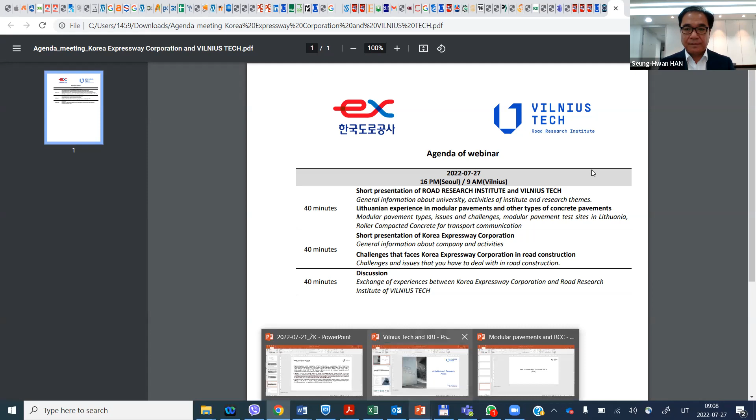Okay, can you see the slides? Yes. Okay, so activities and research area. Today just a few sentences about us. We have 2 people attending from the Road Research Institute today. Judita Gražulytė, she is the chief scientist and PhD, and she participates in a lot of activities. And I'm Audrius Vaitkus, head of this Road Research Institute and also professor in the Road Department. Today we are only 2 due to a lot of activities in the institute now.

We also have some of our main people on holidays, and also, as I already mentioned, the COVID situation. So today we are 2, but if there are any questions which cannot be answered by us, we will come back with these answers later.

So some facts and history. The history started in 1922, when the Department of Roads was developed in some other university. Then our university was transferred from Kaunas city to Vilnius city, to the capital. And finally, in 1999, the Road Research Laboratory was established. Based on that, in 2009, the Road Research Institute was established, and we are performing road research activities till now, developing research areas and so on.

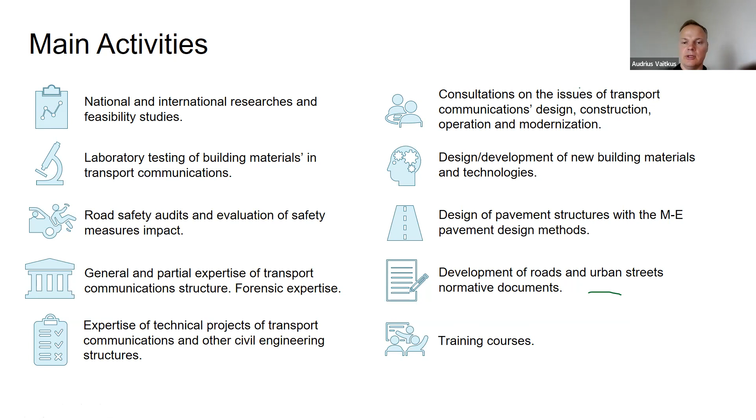Research areas include the 'open road' concept, which is quite well-known and came from the FEHRL - intelligent road building materials, developing new materials, stiffer materials, noise-reducing materials, same price but better quality materials. Then a very interesting and important topic about turning waste into a resource for road construction and maintenance. Of course, circular economy, CO2 emission reduction, and some intelligent engineering measures for road safety.

It was said that we are about 40 members of our team, but we have a lot of different departments in the university, and we provide a lot of connected activities - for example, with the buildings department, bridge department, and also environmental issues department, geodesy, etc. So we have a lot of connected activities with other departments in the university.

We introduce a few slides about our latest research project. Over the last 5 years, we had 3 plants which burn municipal waste, and it generates MSWI bottom ash. It seems that we already have about 150,000 tons per year of this aggregate, which comes from burning municipal waste and getting electricity and also heat for house heating.

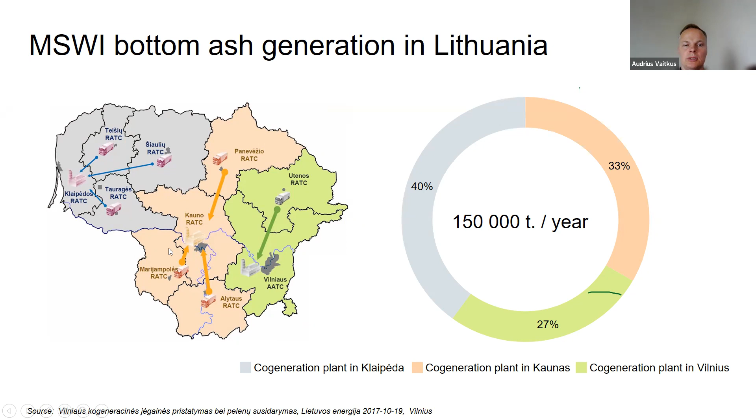And you can see this is like a normal aggregate, but with a little bit different characteristics compared to, for example, dolomite aggregate or granite aggregate.

After our research, it's already stated that it can be used in the lower part of the pavement structure, so in some sub-base layers. And now we are doing some research about possible usage in base layers and even in asphalt concrete.

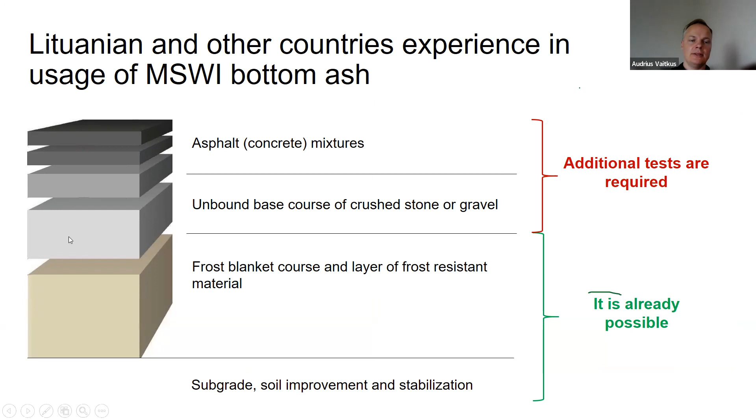So in 2021, a project was started by the Lithuanian Road Administration, and the road was built with this house waste bottom ash, MSWI bottom ash. We had different pavement structures with a section length of 200 meters, and in general it was 1 kilometer.

We installed some sensors, etc., and we have different combinations. For example, all the subbase and bases from MSWI bottom ash, and in other cases we have only subbase and bases with a mixture of natural aggregate and 30% and 70% of the ash.

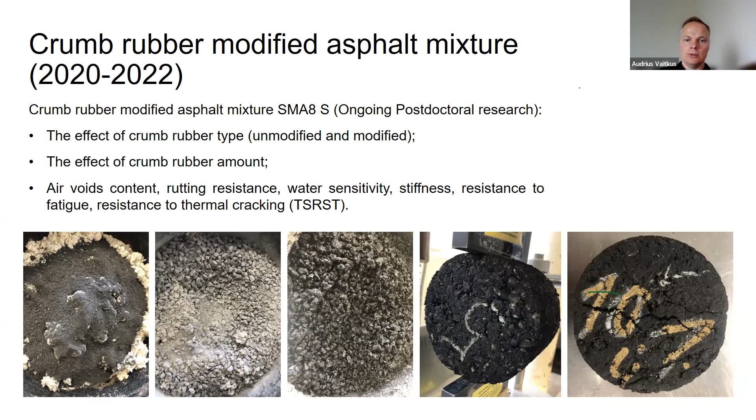Another research project which is important for us, due to the recycling of used tires, is crumb rubber modified asphalt mixture. We have some PhDs regarding this and also ongoing postdoctoral research, to use rubber from used tires for asphalt modification, to replace the costly polymers and to get the same or quite similar characteristics.

So in 2020, just beside our institute, we made a test section where the stone mastic asphalt was modified by crumb rubber. We see that the exploitation of that section is very sufficient, and it can be very easily compared to polymer modified bitumens.

Another important issue is noise mitigation, and from 2014 we developed quite a lot of mixtures related to noise reduction. Here you can see our measuring device, CPX, where we can measure by the close proximity method the tire and pavement surface noise levels.

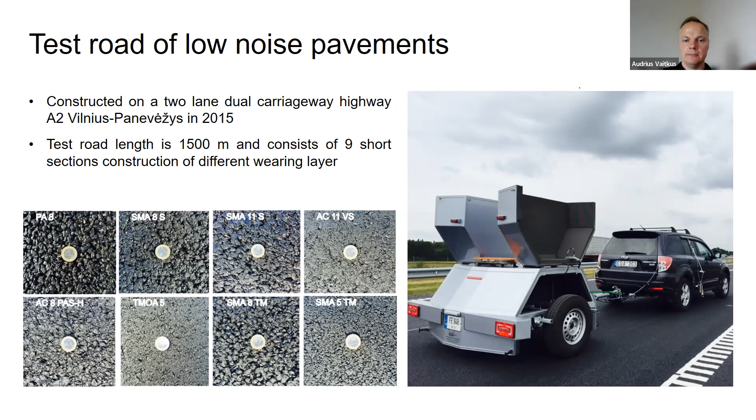And the last initiative comes from business, and we have a design project in Vilnius city, where some cross sections will be rebuilt. In one section we have a very high level of longitudinal slope, and in some sections about 70-100 meters, it's needed to secure that during winter time the pavement will not be so slippery, and the buses which go on that elevation or hill wouldn't slide to the side of the road.

So now we are starting discussion with designers and also with some companies. We will have a meeting on Friday about how to deal with that section and how an anti-icing system based on geothermal energy can be installed.

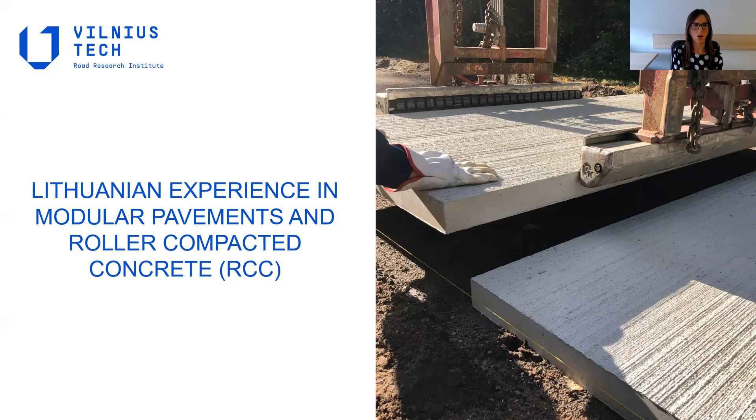As was presented, now we will talk about our experience in modular pavements. As it was mentioned, we had a huge project in 2017, and it lasted 3.5 years. This project was focused on modular pavements, and the aim of the project was to expand the applied knowledge that is essential to the development and commercialization of modular pavements.

So the main concept of modular pavements is that these pavements are precast in the plant, and the prepared slabs are transported to the project site only after the curing period, when the desirable concrete strength is achieved, and these slabs are installed on the prepared foundation. Modular pavements typically are also known and named as precast concrete pavements, so in our presentation sometimes we use the abbreviation PCP, which stands for precast concrete pavements.

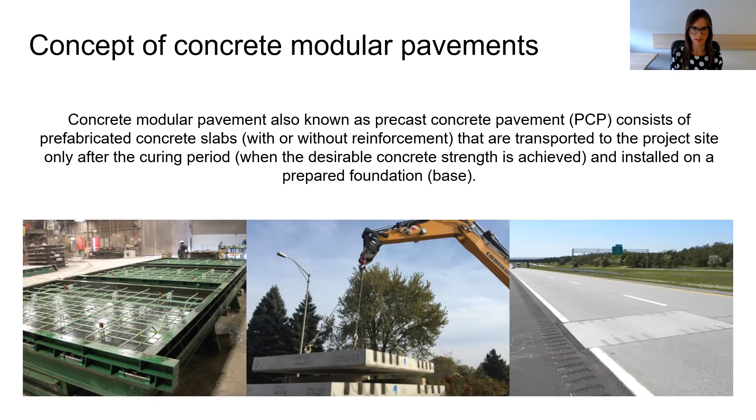Concrete modular pavements are superior to typical pavements because they are fast constructed and fast repaired. Typically, the works are done during the night, from about 8 p.m. up to 6 a.m., which means traffic congestion is reduced to the minimum because the whole road shouldn't be closed, and of course the traffic volume is much lower.

Also, slab prefabrication in a plant results in better concrete quality because we can control it better, and we can control the curing conditions, which is also very important for the final product. When we produce modular pavements, we practically eliminate the risk of material segregation, which is very relevant and important for asphalt pavements when we transport the materials. In the modular pavement case, we produce slabs in the plant, so we don't need to transport all these materials, and we eliminate this risk.

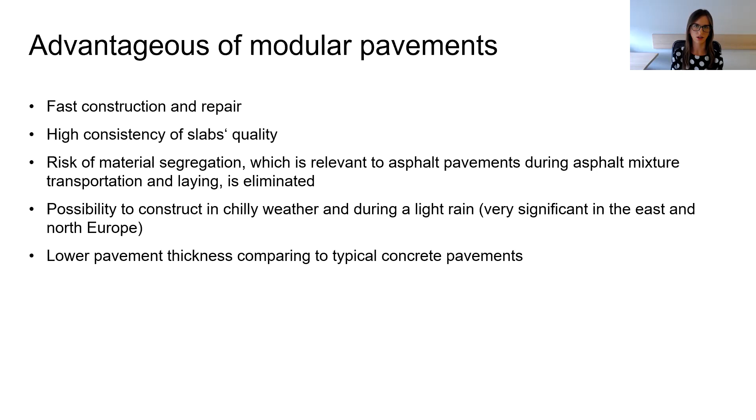In general, three types of concrete modular pavements exist. The first one is precast prestressed concrete pavement. The second one is jointed precast concrete pavement. And the last one is incrementally connected precast concrete pavement. We will discuss all three types in more detail a little later.

All types of these pavements can be used to construct new pavements and to repair existing cast-in-place or even precast concrete pavements.

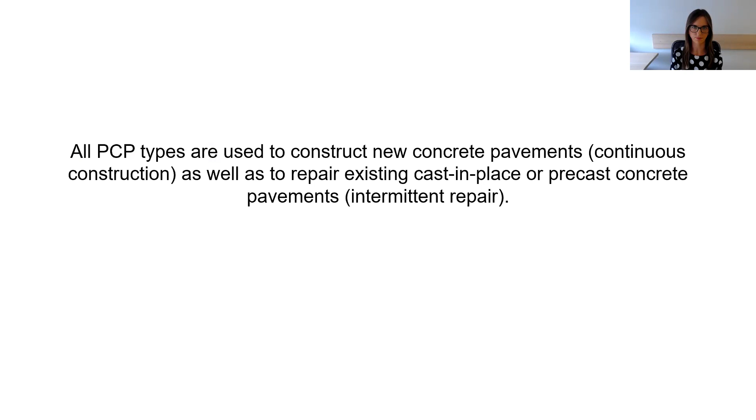So let's get back to all three types. As I mentioned, the first one is precast prestressed concrete pavements. This pavement consists of wide and quite short panels, which are post-tensioned together in the longitudinal direction on the project site in order to form an effectively jointless slab. Each separate slab is prestressed in the transverse direction during fabrication, and the width of the panel is usually equal to the full width of all traffic lanes, and of course shoulders if needed. The length of the panel varies from 2.5 to 4.3 meters.

What I like to say is that this type is very rarely used, and most test sections were constructed at the beginning of the development of modular pavements.

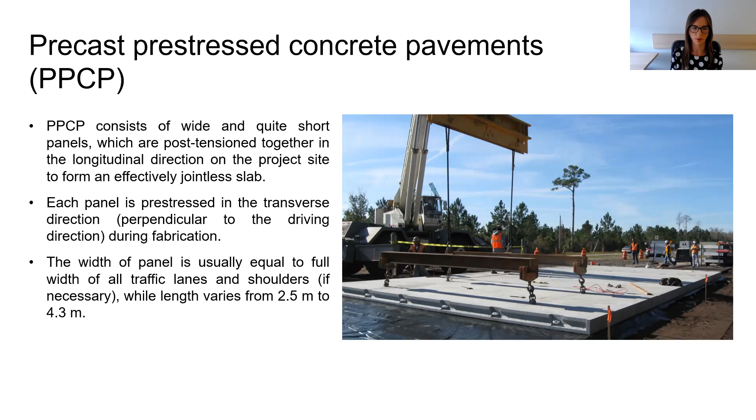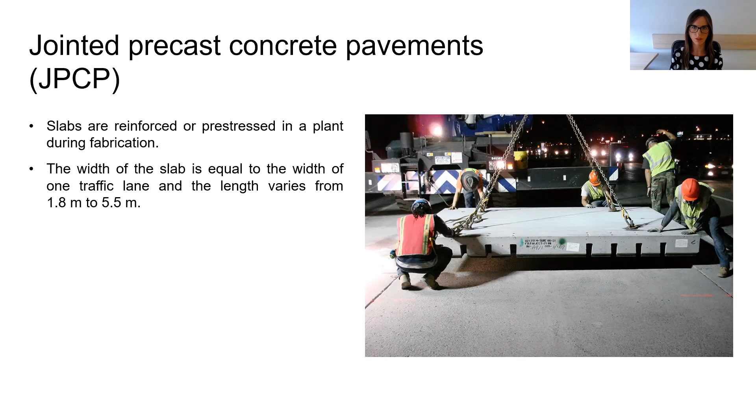The second one, and the most popular type of modular pavements, is jointed precast concrete pavement. In this case, slabs are reinforced or prestressed in a plant during slab fabrication. The width of each slab is typically equal to the width of one traffic lane, and the length of the slab varies from 1.8 to 5.5 meters. All slabs together are connected on the project site using different systems of dowel bars and slots.

Typically, these systems with dowel bars and slots have to ensure that load is transferred between the slabs. It is known that at least 11 different systems based on this concept are developed.

The main difference between these systems is the techniques used to connect the adjacent slabs and to level the slabs. Now we will look more deeply into some of these systems, how they differ, and what are the main characteristics, aspects, and so on.

The first one, I would say the most known system, is the Fort Miller Super Slab system. This system was developed in New York. The precast slabs are constructed on a thin bedding layer, which is placed over the existing subbase. In this system, dowel bars, tie bars, and slots are cast into the bottom of each slab.

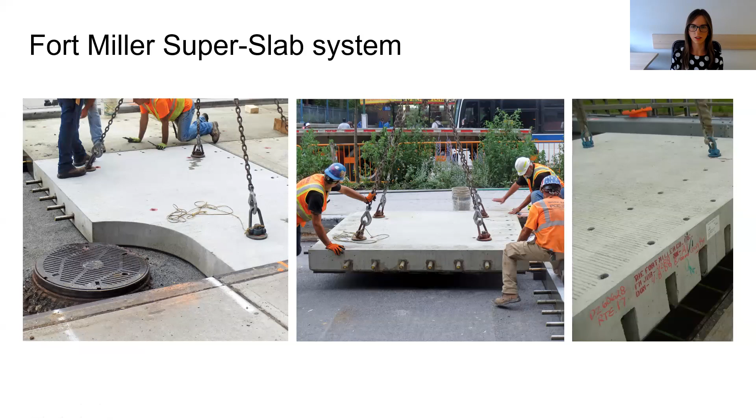A special method with two grout ports, which you can see here, is designed so it would be easier to pour the grout that fills the slot and ensures there is no air between the dowel bar and slot. The second system is the Quick Slab system.

This system consists of patented Quick Joint steel couplers, which interlock reinforced precast slabs, allowing reinforcement to continue throughout the length of the connected sections. The main drawback of this system is that the length of the adjacent slabs is limited, and expansion joints between connected sections have to be installed.

The third system is from the Netherlands. The main difference from other systems is that the slabs are not connected with dowel bars. Instead, they are placed on precast reinforced concrete piles with cross beams and connected to them using pre-stressed anchors. However, slabs can also be constructed on grade support, in which case the load transfer between adjacent slabs has to be ensured.

In the ModieSlab system, slabs are constructed of a reinforced concrete layer covered with two porous concrete layers. The upper layer of porous concrete is fine-grained, while the bottom layer is coarse-grained. This composition enables a reduction in tire-pavement noise, and slabs are typically manufactured upside down in order to guarantee a very even surface.

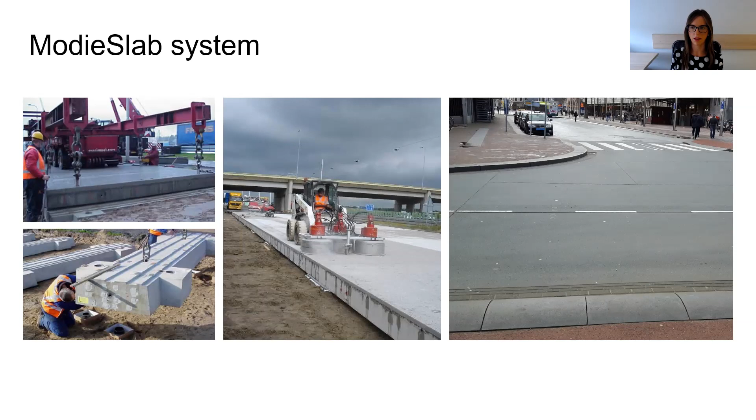Also, if there is a need, the ModieSlab system can also contain a pipeline system to control the temperature of the slabs. One more system is the prime system.

This system is unique because of hexagonal shaped slabs. The joints between slabs are filled with waterproof polymeric material. In this case, slabs are mechanically independent. Otherwise, concrete connection keys are used to connect adjacent slabs, and joints are filled with fine-grained sand.

When using fine-grained sand as the filling material, pavement is built in successive lines, progressing from one edge to another, and slabs are interlocked to each other. This interlocking enables some level of load transfer at the joints and leads to smaller slab size.

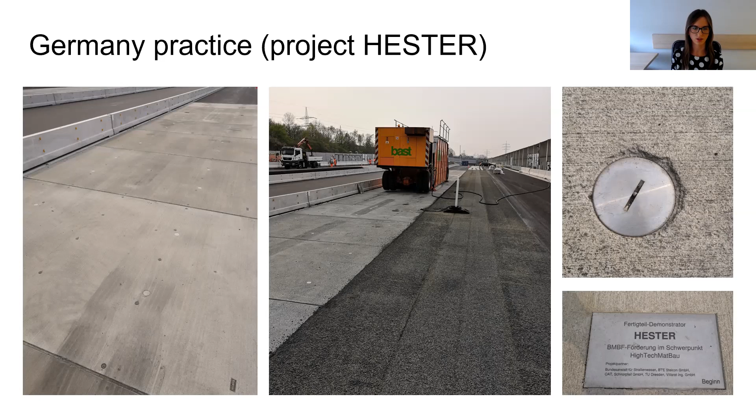The consistency of the foam is very important, since in the first tries to install these slabs, the foam was too viscous, too dense, and actually the foam should be very liquid, like water. Then the composition of the foam was changed, and it was successfully installed.

The last type of precast, pre-stressed concrete pavements is incrementally connected precast concrete pavements. In this case, slabs are either reinforced or pre-stressed. The width of each slab is equal to the width of one traffic lane, and the length varies from 4.6 to 9.1 meters.

Deformed bars are used to connect the slabs, and they also lock the connected joint and enable load transfer across the joint. Active joints are constructed only between sections. This method is more theoretical; in practice it's rarely used, and it's hard to identify in which sections it's actually been used.

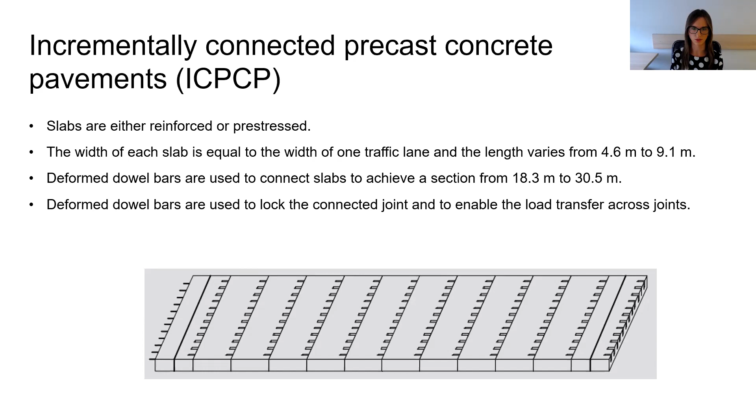Now we will talk a little about the support of the slabs, because it's very important - a strong and uniform slab support is actually key to successful pavement performance. In general, three types of support exist: grade support, grout support, and pile and beam support.

In the case of grade support, a bedding layer is typically placed on the existing pavement. In the grout support case, leveling boards or shims are used, and the gap under the slab is filled with a high-strength bedding grout.

In some cases, urethane grout is used, for example polyurethane foam materials, and in these cases there is no need for leveling boards and shims. You just pour the foam under the slab, and it will expand and lift the slab to the desired position, providing uniform seating of the slab over the existing base.

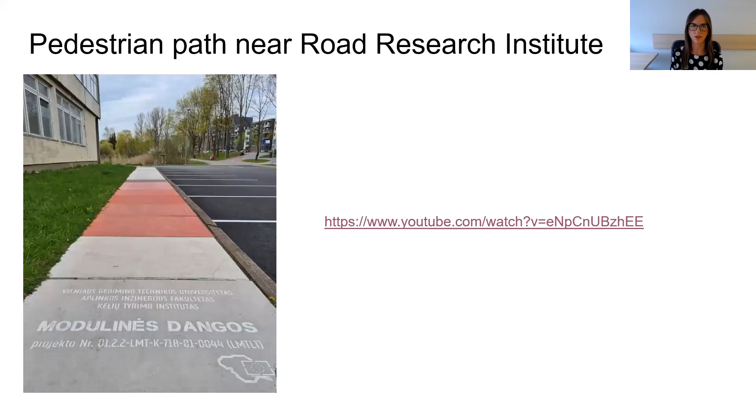As mentioned, most of our test sections are pedestrian paths. Here is a short video of how we constructed it.

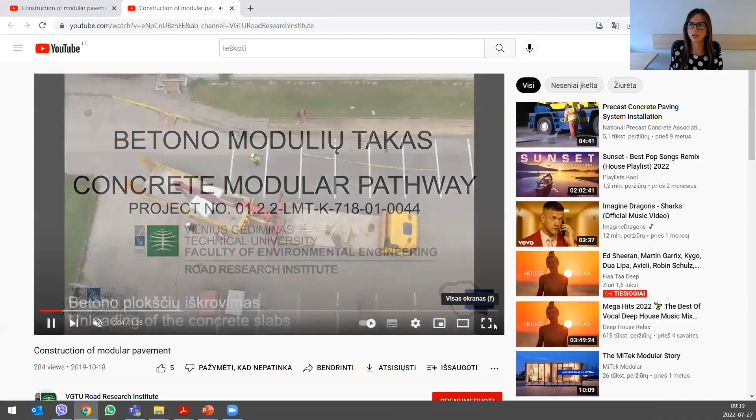Do you see it? Yeah, okay, yes, it's okay.

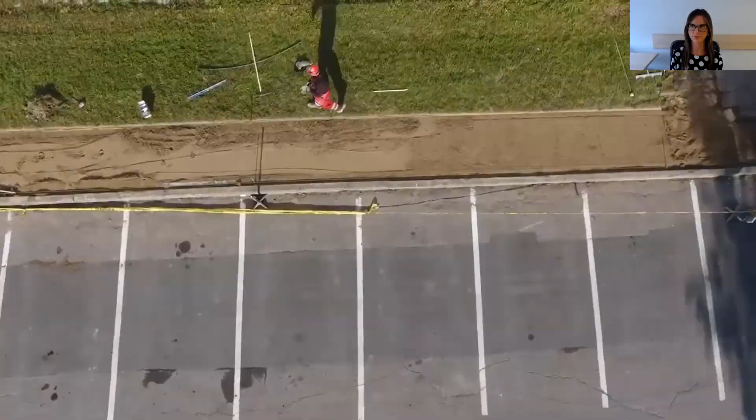As you can see, the slabs were produced at the plant and then transferred to the project site. The site is near our institute, so we have a nice sidewalk. On the existing pavement we put a bedding layer, and on that bedding layer the slabs were constructed.

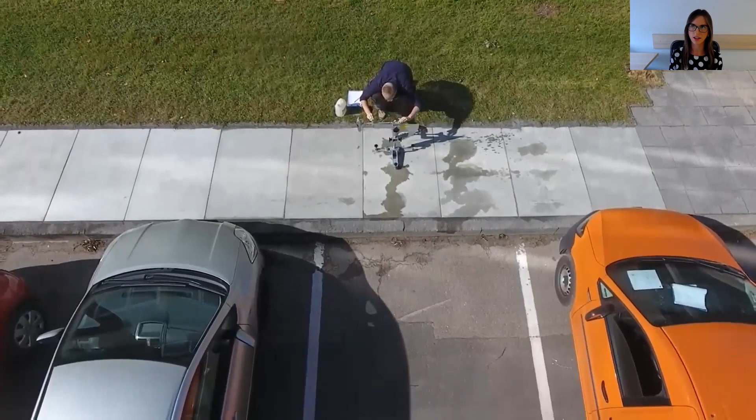You can see here a vacuum machine which helped to lift the slabs and transport them to position. After construction, we made different measurements. We measured texture because we designed different types of texture using different surfaces.

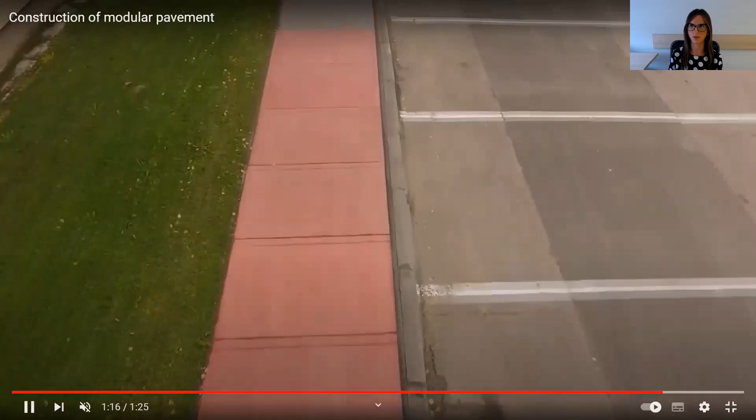And here is our pathway made from different modules. So shortly about this.

As I said, this pathway is near our institute and it was constructed in 2019. Slab dimensions are 1 meter length, 1.5 meters width, and 5 centimeters thickness. The slabs were without reinforcement, and the total length of the path is 21 meters.

We have 4 different pavement structures: smooth surface, smooth texture, rough texture, and texture achieved as a result of exposed aggregate concrete usage. These textures were achieved by using different texture mats. We also used two different agents to achieve red color: powder and liquid pigments.

The slabs were produced from a typical concrete mixture with synthetic micro and macro fibers, which were added later. 20 slabs were produced with these mixtures, and one slab was produced from exposed aggregate concrete, developed at our laboratory. All slabs are without reinforcement, and joints between two slabs were filled with granite screenings.

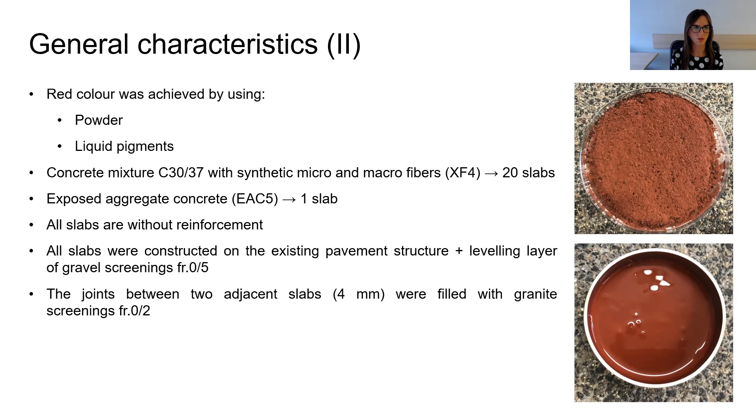Also, we have some scaling and pop-outs, and they are mostly related to winter maintenance, because we are using de-icing salts and chemicals, and of course it's a result of freezing and thawing cycles, which are quite often in Lithuania.

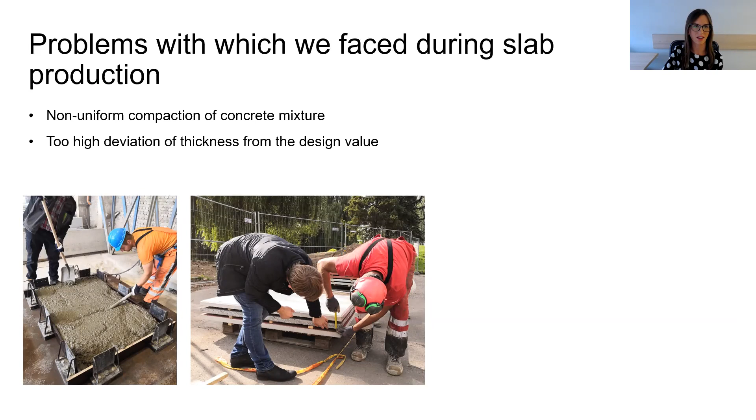I'd also like to show what problems we faced during slab production. One of the main problems was non-uniform compaction of the concrete mixture. We also had too high deviations of thickness from the design value, so in some cases we had even less than 5 centimeters, and there was too high water-cement ratio. All of these problems can actually be solved by precise production quality control.

Actually, it was our first trial, and we had a company who produced these slabs, and it seems that they didn't believe in our project, and probably that's why we had these problems.

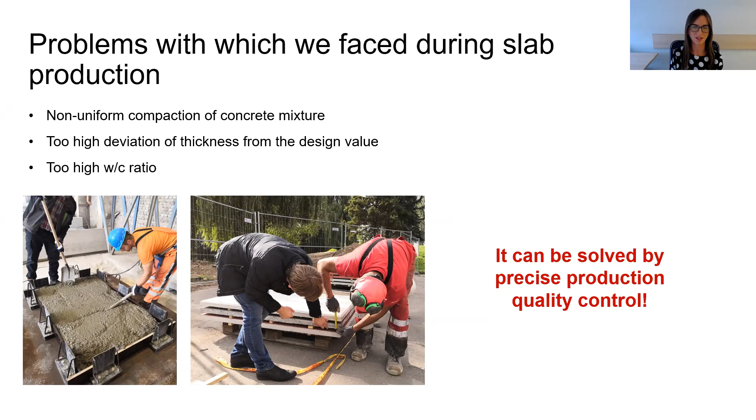The second test site is a pedestrian path in another street of Vilnius. This pedestrian path was constructed in 2020. The slab dimensions are 1 meter in length, 1.8 meters in width, and the thickness this time is 6.5 centimeters. The whole length is 22 meters, and the texture is the same, and it was produced with a concrete mixture.

with exposure class XF4. It means that it should be resistant to freezing and thawing cycles, and to chemicals that are used for de-icing, and all slabs were reinforced with 2 mats, top and bottom.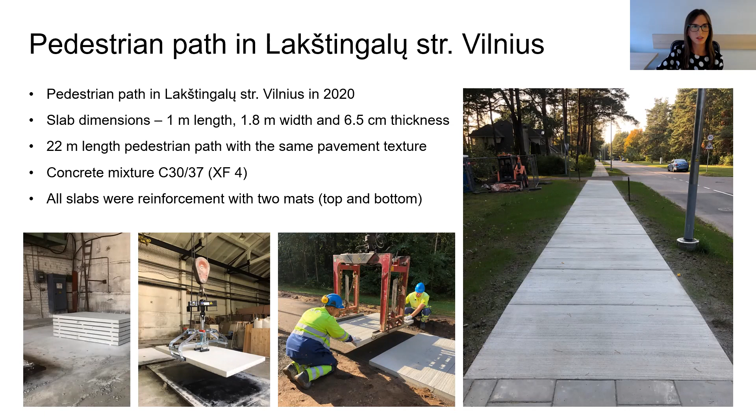And actually, it seems that it worked quite well. Here is the pavement structure, and joints between two adjacent slabs were filled with granite screenings. For this pedestrian path, we also used municipal solid waste incinerator bottom ash, which was presented earlier.

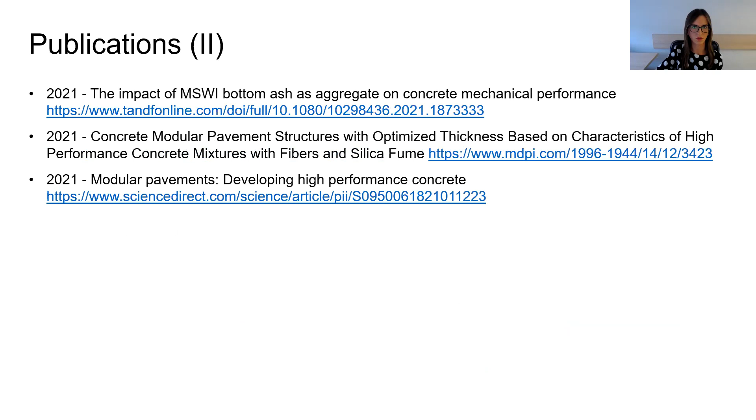So here are all our publications that were delivered during the implementation of the project. We also have some patents. Most of them are for the designed concrete mixtures, and one patent is submitted to the European Patent Bureau.

Here are our main findings and recommendations for further research. I will go very fast for them, since we have other presentations. In general, as I mentioned, the most popular type of precast pavement is jointed precast concrete pavements, and these can be used both for repairs and continuous construction.

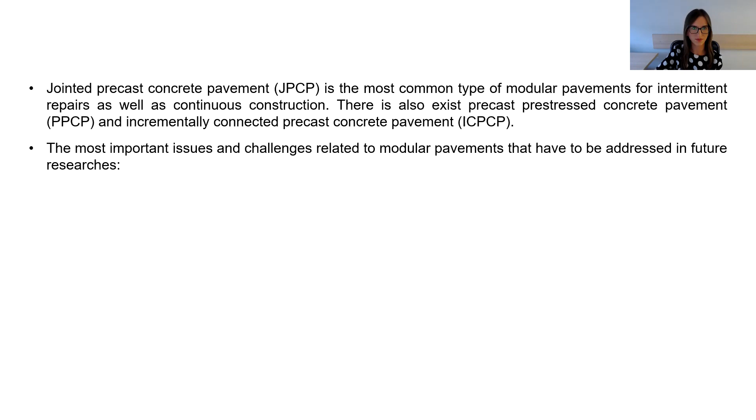During our project, we identified the most important issues and challenges related to modular pavements that have to be addressed in the future. These are fabrication of slabs, assurance of uniform support, and very important, the connection of the slabs, etc.

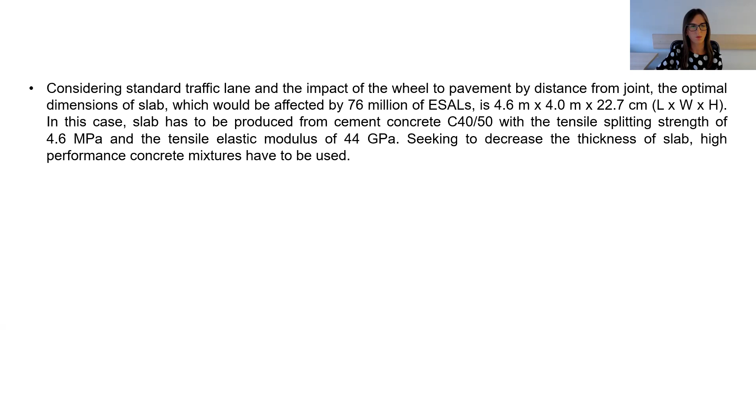Here we used the existing calculation methods and determined the optimal dimensions of the slab in this specific case. It was determined that, seeking to decrease the thickness of the slab, a high performance concrete mixture had to be used, and later we developed this kind of mixture that helped to reduce the thickness of the slab.

Also, we tried to produce slabs with municipal solid waste incinerator bottom ash, and it resulted that we can replace up to all of the coarse aggregate.

We also developed exposed aggregate concretes for sidewalks and for highways, and it is recommended to use a negative retarder when we are preparing exposed aggregate concrete elements.

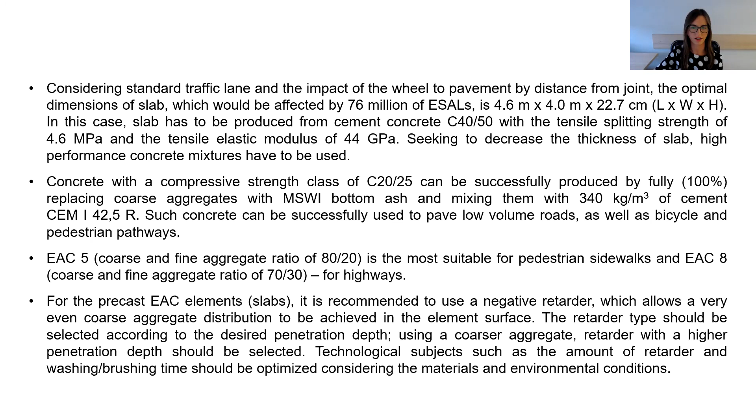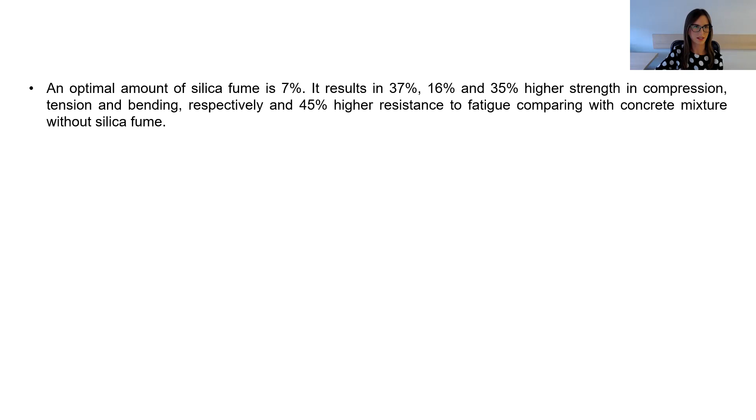Also, we checked if silica fume is worth using, and it seems that 7% is the optimal content, and the use of both fibers and silica fume leads to the best mixture performance.

We later developed a mixture which has both these elements, and the use of this mixture results in the reduction of thickness from 322 millimeters to 200 millimeters if it's an unbound base course.

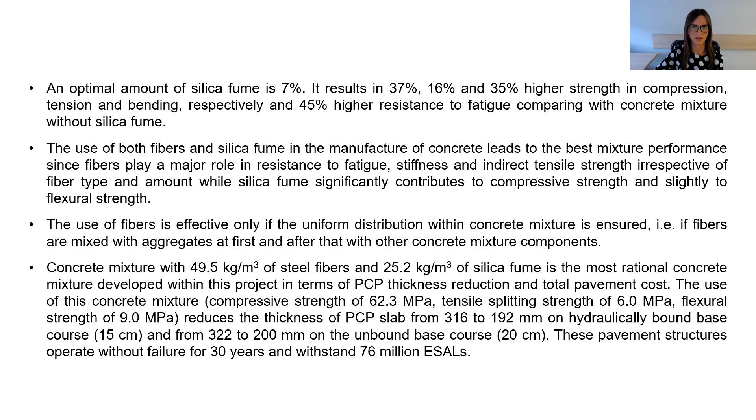And our last recommendation and finding is that 6.5 centimeter thick concrete slabs with top and bottom reinforcement can be successfully used to construct pedestrian and bicycle paths and sidewalks. So that's all from the modular pavements topic.

And now we are going forward to discuss roller compacted concrete.

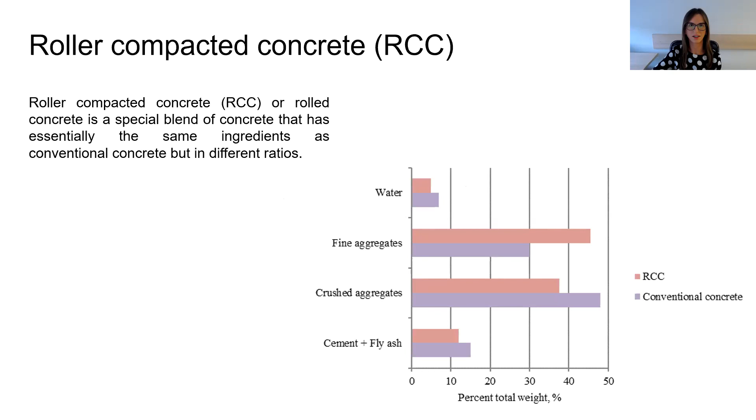Maybe you would like to share my... Yeah, I will share by myself, okay? Okay. If you could stop sharing. So you are going to share? Yes, I will share. Okay, sorry, yeah, fine. Okay, can you hear me properly? No?

Okay, so roller compacted concrete, as we started to use it some 5 years ago in Lithuania, comes from history. It was developed some almost 40 years ago in the United States. Afterwards, there was quite a lot of improvement in composition and possible usage areas, etc.

Dealing with the differences between roller compacted concrete and regular conventional concrete, you can see from the graph that in roller compacted concrete we have less water, more fine aggregates, less crushed aggregate, and less cement. But we can reach the same characteristics, the same strength, compression, and flexural strength as the conventional concrete mixture.

So the possible usage is container terminals, seaports, airport aprons, roads and streets, and also it can be used as a base layer for highways when we use joint plain concrete pavements. It can be used as a base layer.

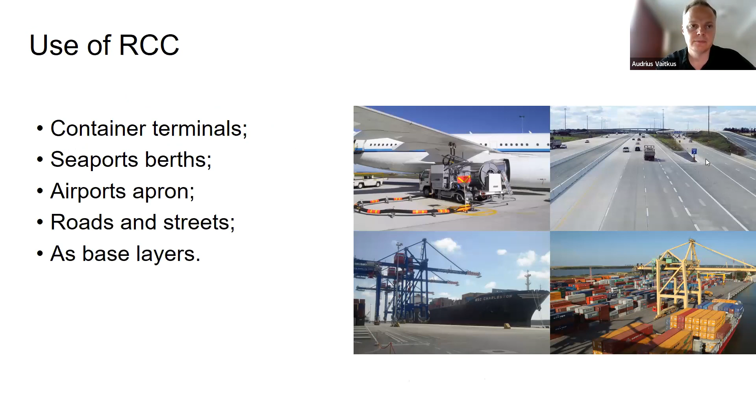So some advantages and disadvantages: fast construction, economical, long life, ability to withstand high stresses and high bearing capacity. Quite a lot of advantages, but some disadvantages - there are additional requirements for the concrete plant. To get a very good composition of mixture, very precise organization of work is required, as you should do quite a lot of things in very short time to deliver the concrete on site, lay it down, and compact it during 1 or 1.5 hours.

Smoothness and aesthetic appearance sometimes isn't the same quality as joint plain concrete pavement when we use the slip form paver. So the typical structure - here you can see that it was a developed pavement structure.

With a stabilized base layer, so there is no regular unbound base layer. We developed the pavement structure so we do not need to do a lot of soil replacement, so it is cost efficient. Then we can use the same soil which is on site, and we have to stabilize it.

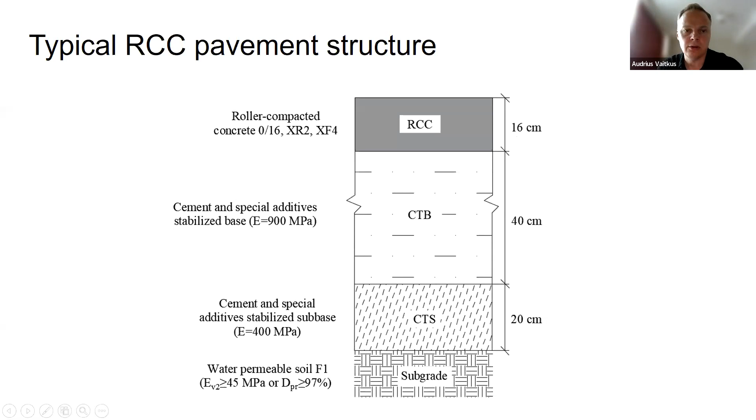This is like an example for a quite heavy crowded road or area, and how it looks on site. You can see the stabilization, the cement, some additional preparations, also some additives - cement, water, and intermixing everything, then compacting. So it will be the base layer.

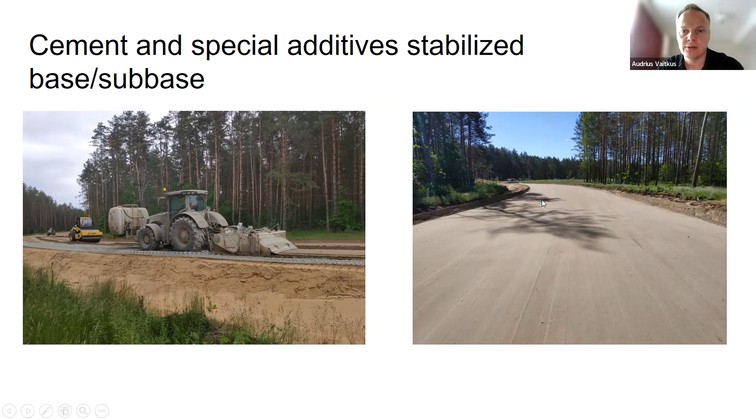So how it looks like after compaction, and finally laying down the roller compacted concrete on top. You can see it looks like a regular asphalt paver, but with high density, high amplitude, and high frequency compactor. After the paver we get quite a high level of compaction, 95%, and afterwards we have to compact with the roller till 98%.

Starting from 2016, the first section was in a private territory, private road, and this is the combination. We used different thicknesses, starting from 10 to 16 centimeters, and only 30 centimeters of stabilization. After 8 years, the road is in good shape and good condition.

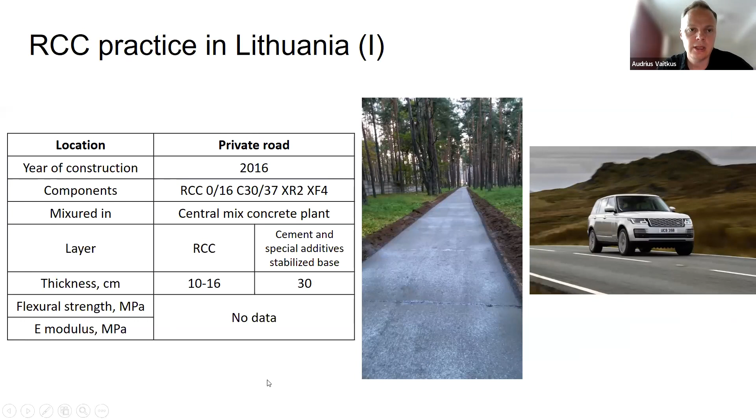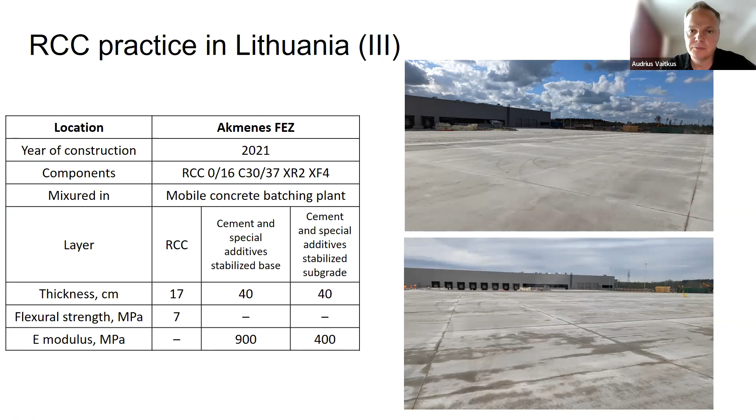Another project is for a pedestrian pathway in Kaunas city by the Neris river. And in 2021, we started with very crowded areas, so high stress pavements with a lot of heavy vehicles. You can see here 17 centimeters of roller compacted concrete. Each time we calculate what minimum thickness is needed to carry the heavy loads, and another project for military purposes.

We already had almost 2 years of monitoring of this road, and it is in very good condition. Even tanks are using this road.

Also another military project in another military small city, we can call it that. In previous time we used a lot of precast concrete plates, but it was not a very good aesthetical view, and also they have quite wide joints, so it's not very convenient to walk on that type of pavement. Now the military want to have a lot of these roller compacted concrete pavements, and they like them very much.

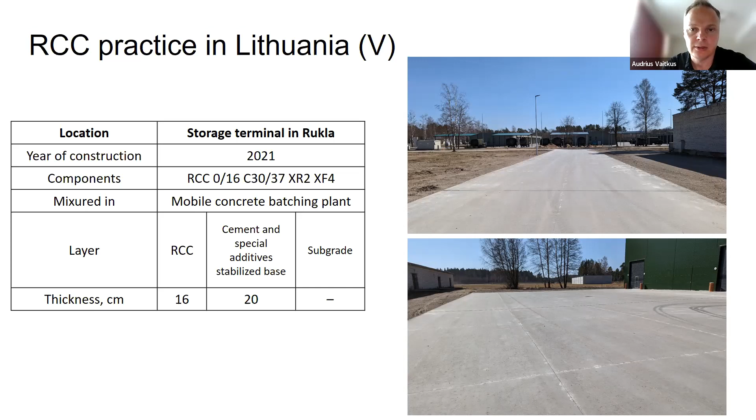So the last activities in this year. Some companies have very good concrete mixing machines, and the best quality we get when we produce concrete mixture on site, very close to the construction site, because we have to mix, deliver on site and compact within 1.5 hours. This is quite a short time. Of course, we can use some additives which can expand the time for laying down and compacting the layer, but still it is very efficient, and you have a mixed plant on site.

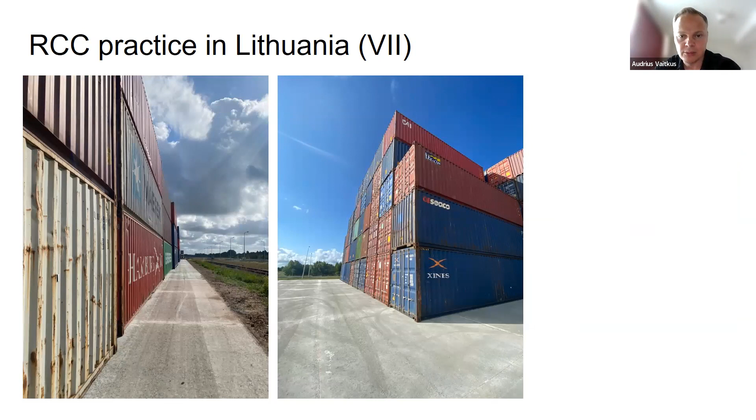So here are some examples. We have national standards with typical pavement structures and typical pavement thickness for some design load. For example, DK10, that means 10 million standard axle loads of 10 tons can pass this road during the design life.

But we have a lot of different situations, for example 7.7 million axle loads, and using some special design methods, we can calculate precise thicknesses of pavement structures depending on the particular pavement load, the design load.

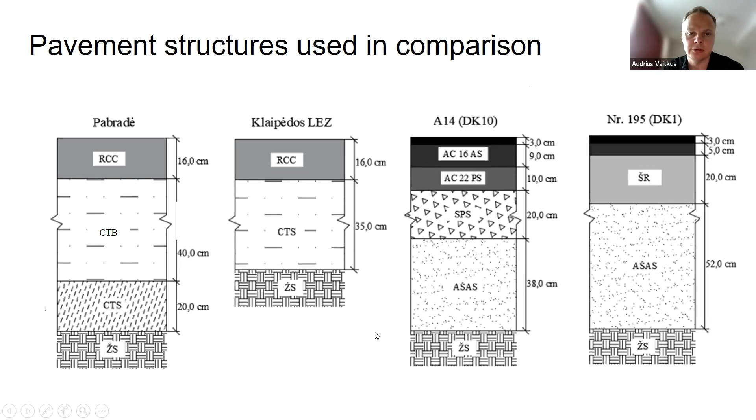This is a short presentation from our side. We are a little bit behind schedule, but I hope it was interesting, and if you have some questions, we will be happy to answer them.

Thank you so much. It was very interesting.

And yeah, let me give you my presentation. First of my presentation... can you hear me clearly? Okay, yes.

My first presentation is on the status of expressways in South Korea and the Korea Expressway Corporation. That's the content of this presentation.

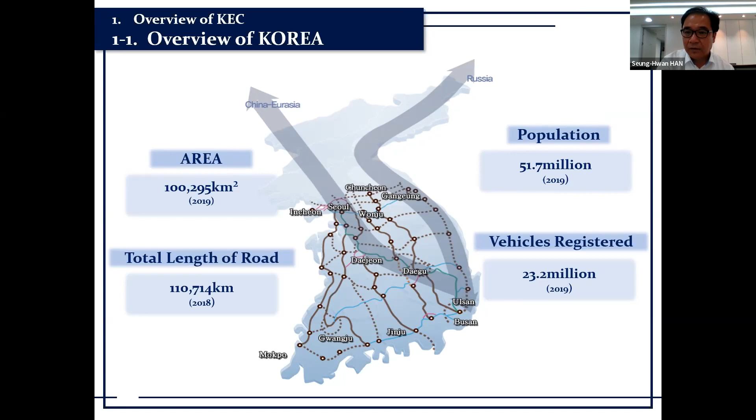This is some statistics of South Korea. We have 100,000 square kilometers and 51.7 million population. It's quite a densely populated area compared to other countries. And we have 110,000 kilometers of road length, and 23.2 million registered vehicles. Our size is quite similar to Greece among European countries.

Our roads are composed of expressways, national highways, metropolitan city roads, provincial roads, and county roads. The expressways and national highways in particular are managed by the central government, the Ministry of Land, Infrastructure and Transport. And expressways in particular are managed by the Korea Expressway Corporation, which is a public company like the Autobahn in Germany and Asfinag in Austria.

Almost all expressways were built, operated, and maintained by Korea Expressway Corporation. As you can see in the slide, 617 kilometers of expressways were built by PPP projects, owned and managed by private companies. The particular thing about Korean expressways is that almost all are toll roads, meaning maintenance and rehabilitation work is funded by toll fees from users.

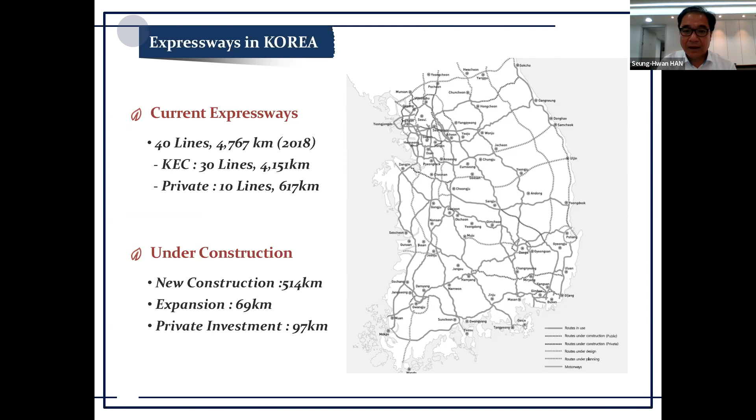That's the final master plan of the network in South Korea. We call it the 7x9 network system. By 2020, we have 4,900 kilometers of expressways around the country.

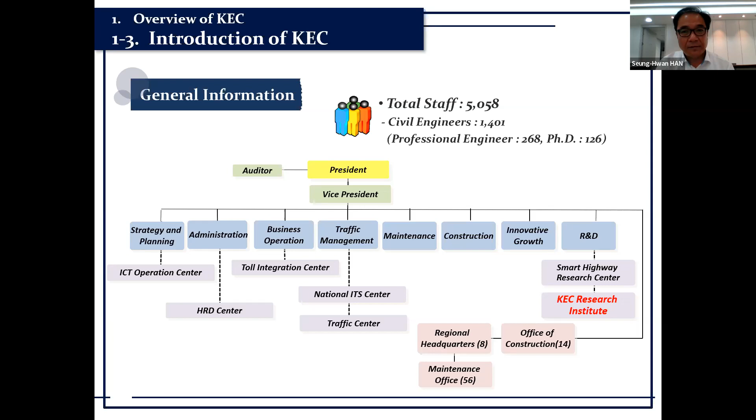This is the KEC general information. Korea Expressway Corporation has 5,000 staff. One of the divisions is the R&D division, which I work for. The R&D headquarters is composed of 3 parts. One is the research institute, which is the main body.

And we have 2 special centers. One is the Smart Highway Research Center, the other is the Smart Construction Research Center. The Smart Highway Research Center is for preparing automated roads, interconnected roads, and unmanned vehicles. The Smart Construction Research Center is for automation in construction works, civil works, and roadways.

We actually started as a small lab in 1969, and in 1989 we were certified as a public research institute specialized in roadways. In 2002 we established our current organization setup, and now we conduct around 100 research projects every year. And that's the vision.

I'll skip this one. This is the organization chart of the research institute in Korea Expressway Corporation. We have some offices and small divisions: Office of Environmental Research, Office of Pavement Research, Office of Transportation and ICT Fusion Technology Research, Office of Structure and Geotechnical Research and Safety and Disaster Prevention, and Corporate Strategy Research.

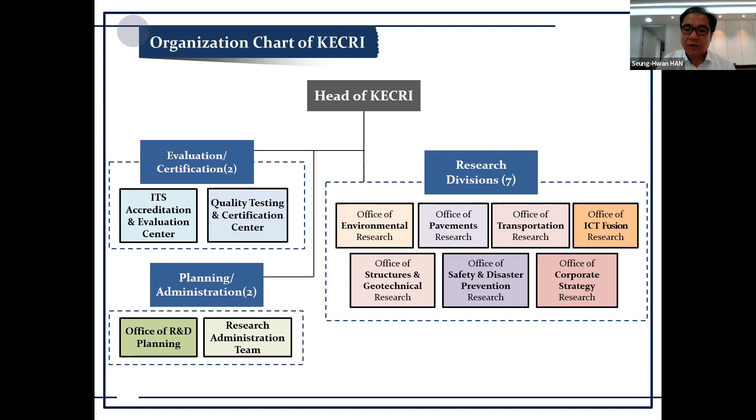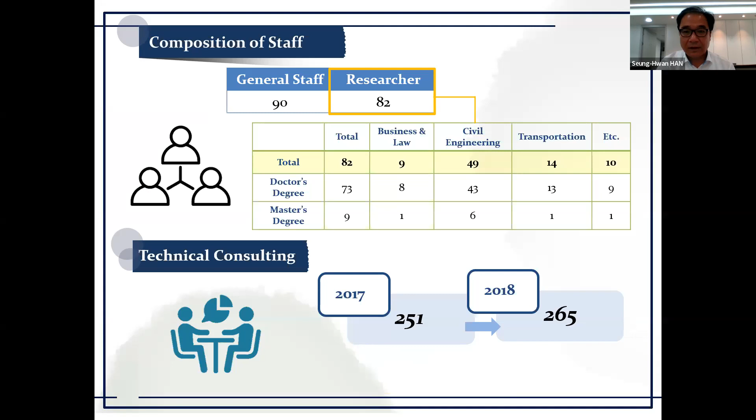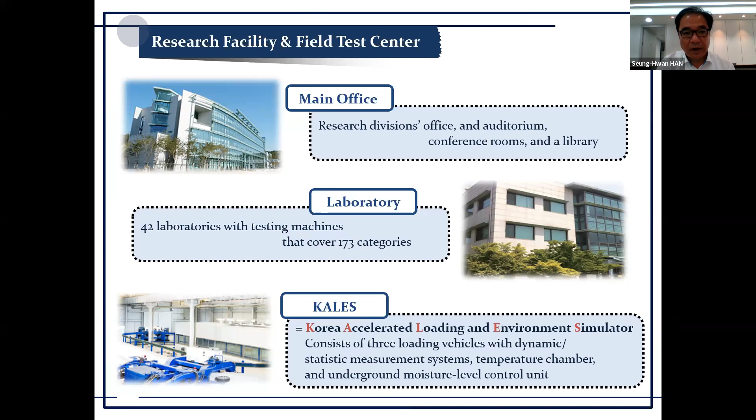I can show you some facilities. You can see the main building, lab buildings, the accelerated loading and environment simulator for pavement, and the driving simulator for automated vehicles. There's also the vehicle crash test center, and we have a field test road of length 7.7 kilometers near the expressway.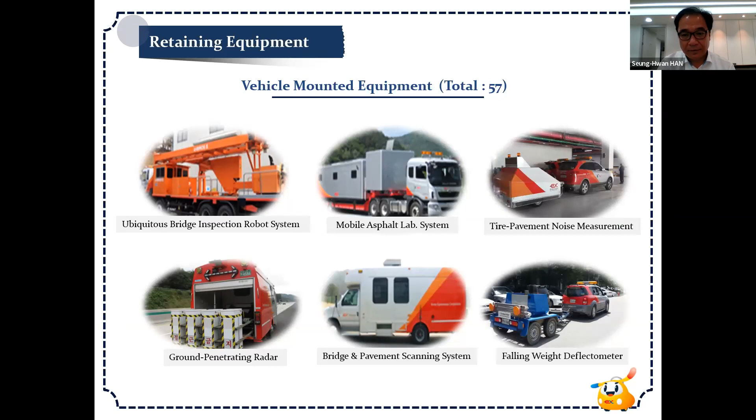Some equipment we have includes an inspection robot system, mobile asphalt lab system, and noise measurement equipment. As Professor Patico said, we have a similar one. We also have a GPR system, a pavement scanning system, and FWD equipment for PMS. And you can see some lab apparatus and lab equipment here.

The main topics of R&D for pavement include pavement design guidelines. As Mr. Batikuta said, we have our own ME pavement design guide, the Korean guide. We developed it, applied it, and modified it.

We also conducted research on pavement material characteristics, PMS systems, and pavement preservation. Particularly nowadays, we are interested in low noise pavement. As you said, you already have that kind of research work. We are also interested in the use of new materials like GFRP, glass fiber reinforced polymer, and life cycle assessment for sustainability.

That's the global network. We have connections with some institutes around the world.

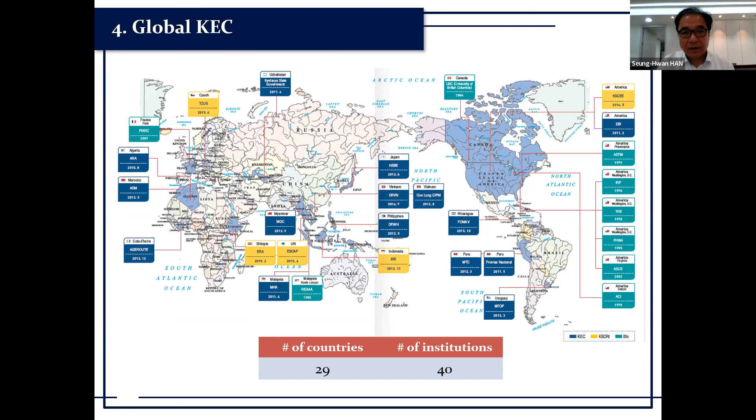Okay, actually I'm speeding up to catch up with the schedule. Forgive me about that.

This is my second presentation, on modular pavement in South Korea. As you know, prefab and modular elements in civil works are getting important. As Dr. Gratulite said, the report on the future of construction pointed out three keywords for the future: one is AI, artificial intelligence, the second is prefab and modular elements in construction, and the third is eco-friendly.

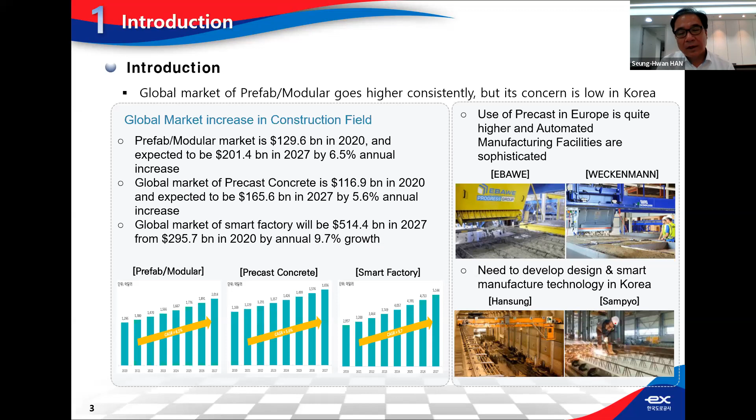Even in the bridge deck or pavement field, that's why nowadays we are interested in modular or precast concrete pavement. As you know, classical construction has obstacles: low productivity, high risk of safety, large impact to the environment, and other social effects like noise and traffic restriction. Even when we use off-site construction in roadways, we also face other problems.

If we solve these kinds of problems in classical construction, we will face other obstacles like logistics. As you know, in roadway civil works, the size and weight of the element is quite larger compared to architectural elements. That's the problem, which makes it inefficient to use modular elements. That was the main concern nowadays.

We applied modular technologies to roadway work. We need to address technological issues, standard issues, and market issues. These are the features of modular pavement in South Korea. We conducted research in the late 1990s, and we have had some pilot implementations, mainly for replacement.

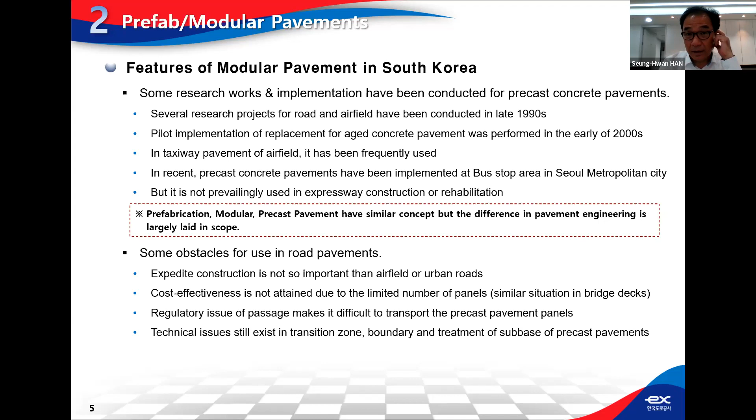As Dr. Gratulit said, we also have treatment of subbase problems. Commonly we use grout base as the common tool for connecting the subbase and the modular pavement.

Actually, we are trying to place the modular pavement with a size of 3.6 meters width and 6 meters length. It's quite heavy, meaning the lifting stress is quite critical. So we need to solve that problem, and if we apply specific equipment to mitigate that critical stress, we can have some cost effectiveness in modular pavement.

That's our concern, along with the tie bar design details. And the grout, the high strength mortar grout, that's commonly used. And some design details we need: the grouting holes, lifting system, tie bar pocket, and approach slab in transition zones.

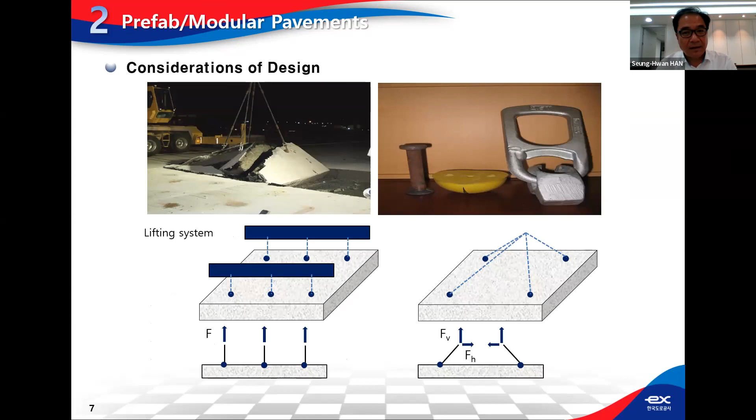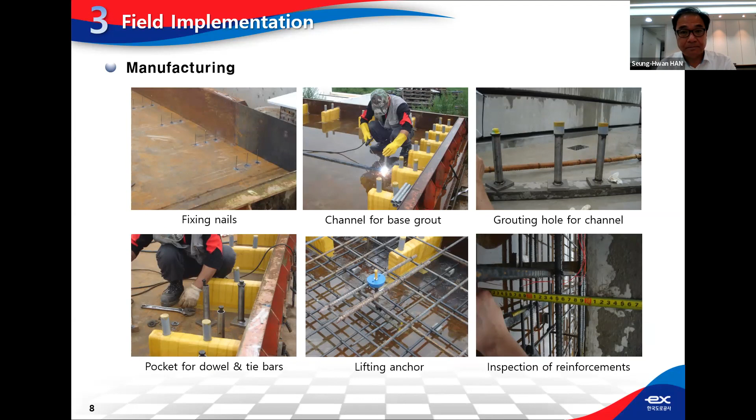This slide shows recent field work for the bus stop areas. They unloaded pavement by crane, positioned it, and grouted with high strength grout. In the bottom two photos on the right side, you can see the connecting of the adjacent pavement to meet with the modular pavement.

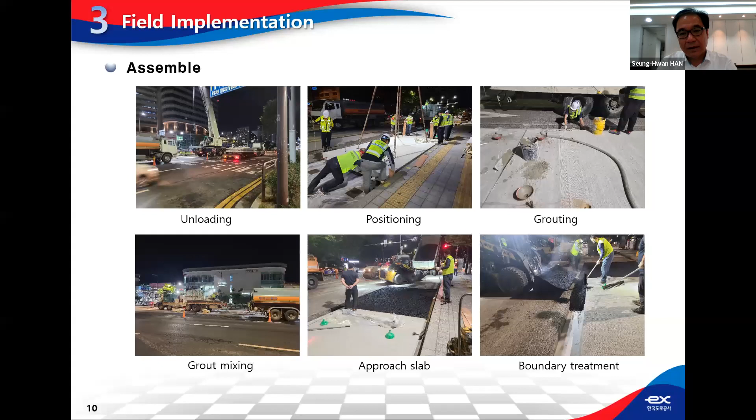We used a kind of approach slab that is half height, half depth, topped with asphalt pavement, for connecting the modular pavement and the regular pavement. In some cases, we have to fill the side of the slab with asphalt, like in this slide. Sometimes this makes inconsistency that causes some problems.

Nowadays, we are interested in adding value to the modular slabs. In South Korea's case, it is quite difficult to attain cost effectiveness in the modular system, for the reasons I said before.

So we try to have a different view about modular construction. If we can reduce the price of the modular element, we can add some values that make it more expensive, so users can pay for it. I think there can be functions like energy harvesting, de-icing, or anti-icing.

Professor Gratulit showed good examples of using geothermal energy for de-icing, and I think that's an important topic for adding value to modular pavement. Another one is condition monitoring, wheel load sensing, smart sensing, markings, surface lightening, or lightweight for long life, that can be applied to add value and make it more cost effective.

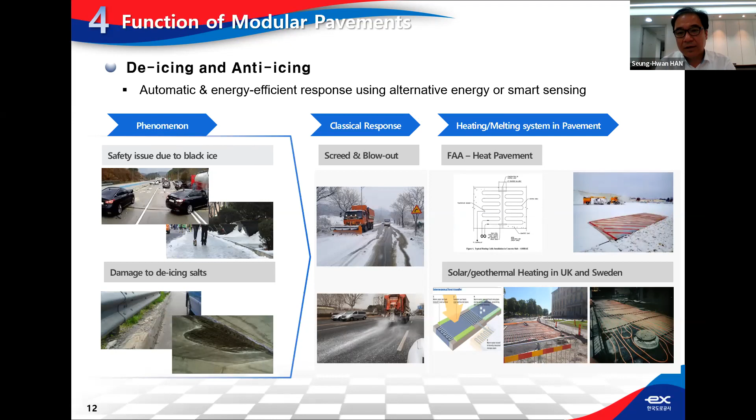That's the conceptual one. After this slide, I'll show you some conceptual, hypothetical ones; some of them are implemented in South Korea, and some are planned to be implemented. You can see some heating for de-icing and anti-icing, using solar or geothermal heating systems.

You can use active control spraying systems connected to the weather station and automatic control system. And I think we can use phase change materials for heating the pavement, for de-icing, for anti-icing. And we can use carbon nanotubes for heating the pavement.

Surely it is quite expensive nowadays, but I believe it is getting cheaper as certain technologies develop in this area. And we can use the precast system with a particular connecting system.

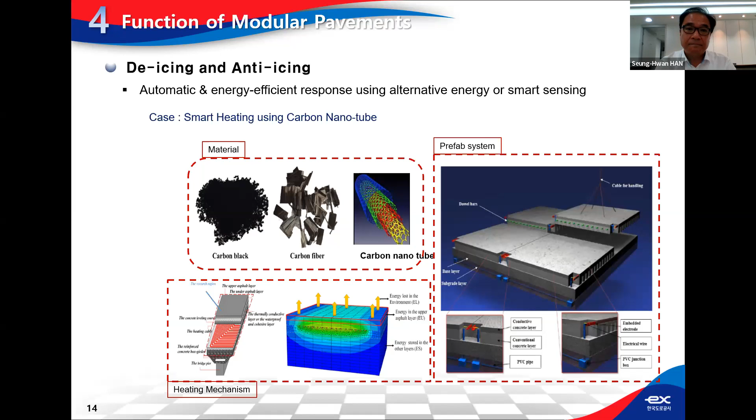As Dr. Gražulytė said, we have different kinds of textures. We can apply different kinds of textures to the modular pavement. I think we can surely add some lighting or lane markings in the modular system, and we can do it more precisely in modular or precast pavement than in classical ones.

This is my conclusion. Actually, in this presentation I don't want to discuss detailed technologies about modular pavement or other technologies, but I want to discuss the future trend of modular pavement, precast pavement. That's why I prepared this kind of content in my presentation.

This is my conclusion: it is expected to use more precast elements in road construction. I believe that, considering digitalization, automated vehicles, and so on, off-site construction using modular and prefab pavement can be a kind of evolution for the future road. The adaptability for smart sensing road is

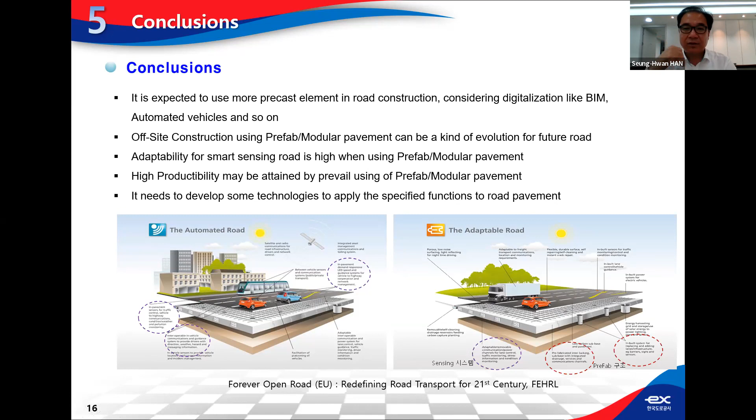Okay, this is my presentation.

roller compacted concrete - do you use that one in highways or motorways? And I think that we worry about the irregular cracking of that type of pavement. That's my concern about using that one, that's why, yeah.

Okay, so thank you very much for your nice presentation. It was very interesting to get more information about the Expressway Corporation. I remember, almost 10 years ago, I was attending the PIARC conference, World Road Congress, also your institute, and some sections of roads. It was very interesting, and thank you for the good presentations.

Regarding concrete pavements in general, actually we don't have a lot of concrete pavements in Lithuania, as historically we are like an asphalt country, I would say. A lot of road companies have their own asphalt plants, and they are very interested in staying with asphalt, not going to concrete. But little by little, we are trying to encourage the use of more concrete pavement, especially in some areas.

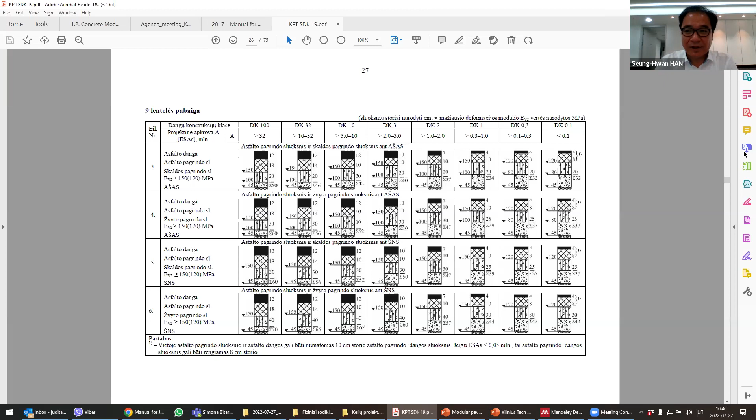Okay, that sounds great, thank you so much. Yeah, I have another question too - this is online. Okay, great, I have another question to the Dr.

So we do not have any specific programs, and as I know, in Europe there are no such procedures. Typically, these kinds of pavements are designed with typical procedures used for jointed concrete pavements, and it is recommended to use the AASHTO latest version Mechanistic-Empirical Pavement Design Guide, because it's developed to calculate thickness for both asphalt and concrete pavements, and it is believed to be one of the best tools. I'd also like to mention there is a very good manual for jointed precast concrete pavement by Smith - if you are not familiar with it, I can share it. It's free, and you can find it online on the website.